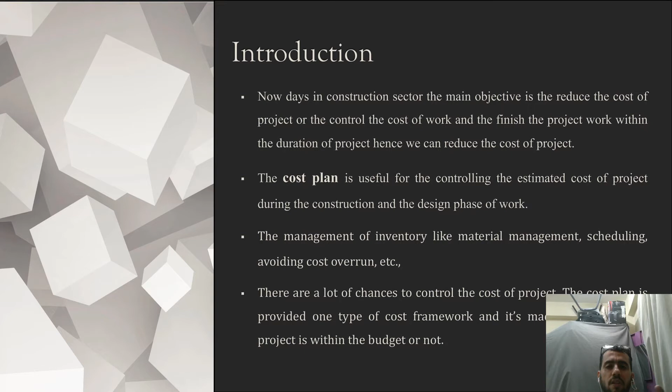What is cost control? Cost control is a process of reducing the project budget by using various techniques and replacing with alternative materials, which helps to reduce the cost of the project.

The cost is controlled by using past construction information and reducing wastage materials, extra equipment, and also by using alternative materials, replacing costly materials for the construction. The main aim of cost control is to gain maximum profit within the decided project duration.

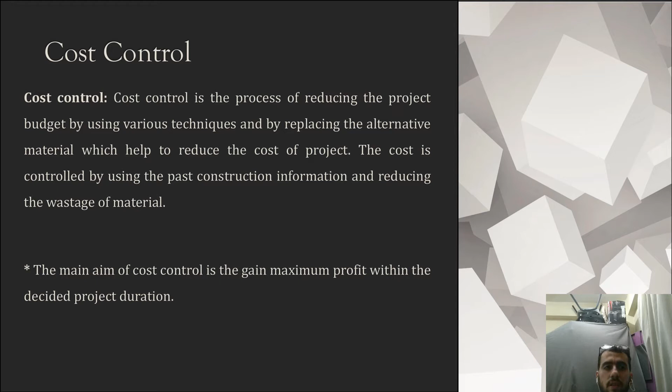Also here, cost planning. Cost planning is the process of management looking to control the design and development within the client's budget. This method helps the client choose how he or she wants to allocate the budget to different parts of the project work, and it's used to represent the cost plan for the project.

The project planning provides the cost structure of the work, and it's useful for deciding the cost of the project or the budget of the project, and the activity of element construction work, as well as the duration of the project work.

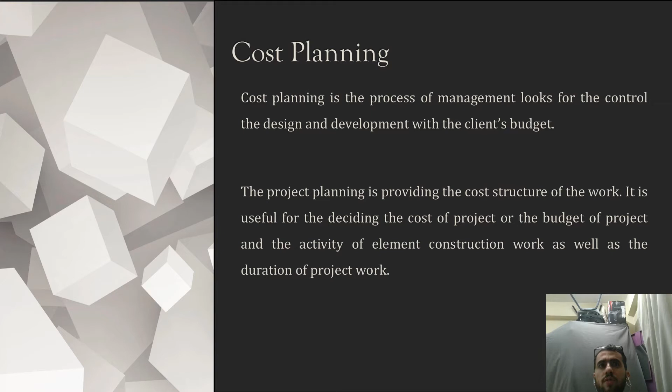In terms of problem statement, usually in the construction industry, the actual cost is more than the estimated cost. This type of problem needs proper management, planning, and control of the work to resolve it.

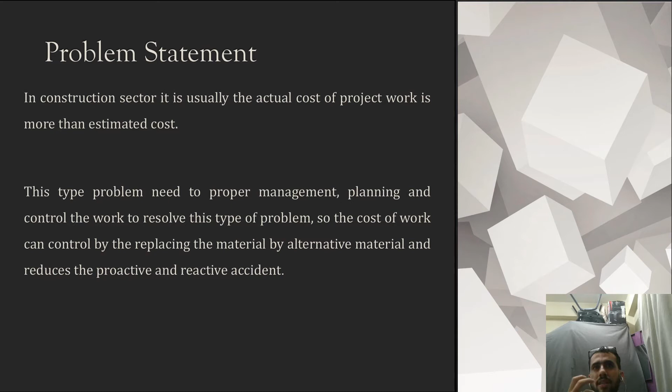So the cost of work can be controlled by replacing materials with alternative materials and reducing proactive and reactive accidents at the site. The main objective of this study is to control the cost of the project by replacing alternative materials and avoiding proactive and reactive accidents in the construction industry.

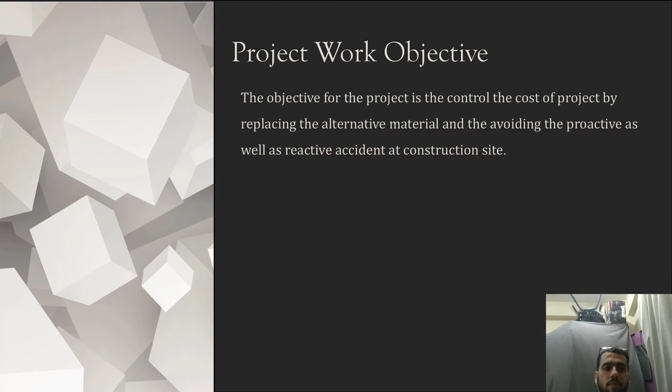In terms of project description, this study has been done based on a residential building called Pride Ashiyana. It's in a suburban area situated near Lohegaon, Pune. This building consists of 548 apartments covering around 10 acres.

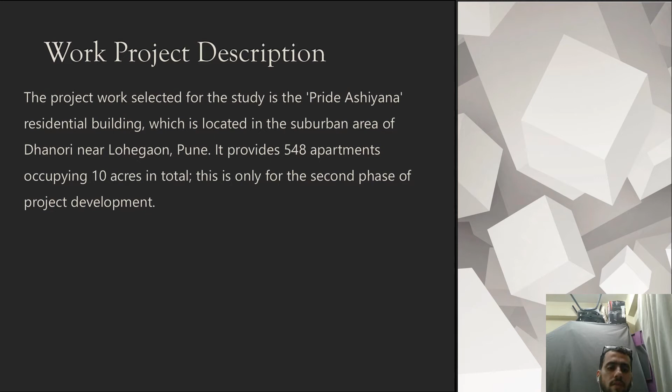Study background, this has been done based on literature review.

There are three different kinds of estimation calculation within the production process, along with a diagram representing the concept of determining the cost. Pre-calculation estimates the future cost before starting production and is used for cost-based decision making, and intermediate calculations are performed within the project for the purpose of controlling the cost.

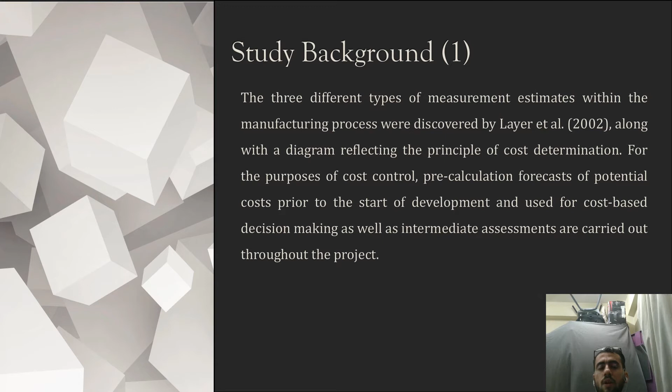From another view, most problems on building sites are the wastage of materials because of varying circumstances. This type of problem needs strict supervision on the losses.

According to Hendrickson in 1988, the wastage of materials takes place within the procurement process, storage, and use, and also damage because of unnecessary handling and transportation.

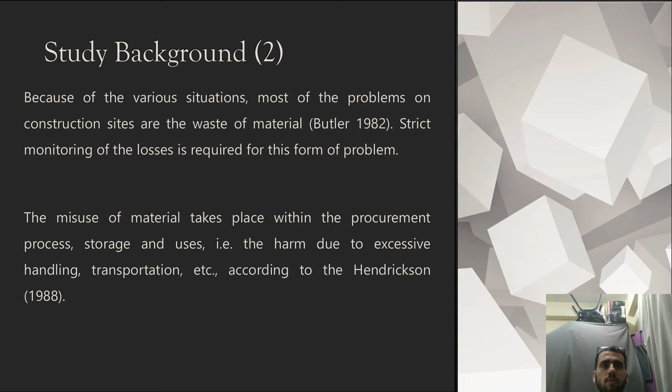Another perspective from Alinaitwe in 2006: he observed that industrializing construction would probably reduce the cost of construction by about 30%, which would likely settle the backlog of 25% of Ugandans without proper housing.

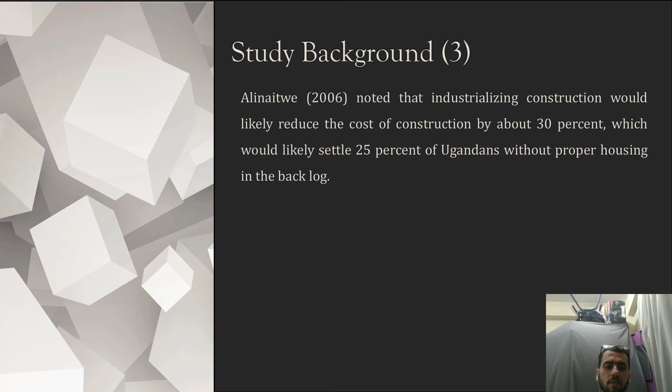For this project, the cost is controlled by replacing materials with alternatives, which can help control the cost of construction and maintain the quality of the construction as well.

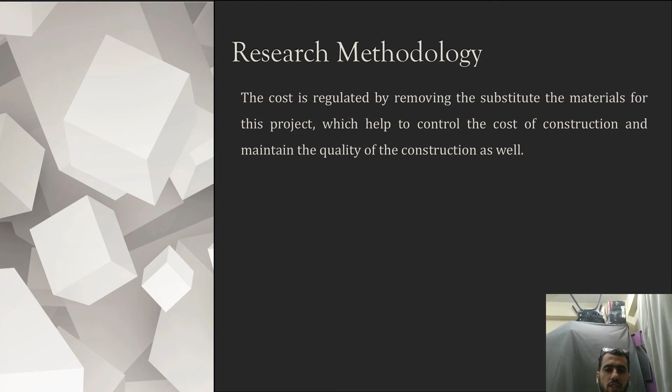In this stage, we have reached the gist of this topic, which is cost control techniques. Based on this study, they use two methods to control the cost. The first one is proactive accident avoidance during the time of construction, which has four items.

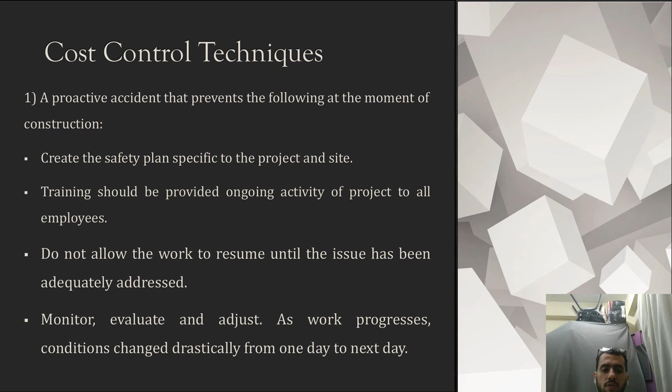The first is to create a safety plan specific for the project and site. Training should be provided as an ongoing activity of the project to all employees. Also, do not allow work to resume until the issue has been adequately addressed. The last one is monitor, evaluate, and adjust as work progresses, conditions change dramatically from one day to another.

The second method for cost control is reactive accident avoidance at construction sites. It has three items: the first is the worker not wearing proper protective gear for the job, the second is the worker not following rules and regulations, and the last is tools malfunctioning and misuse of equipment.

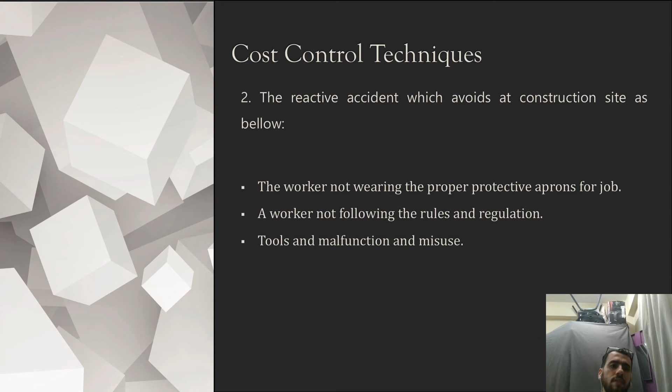For example, the first one is windows. The alternative materials were glass louvered aluminum frame and glass casement. So the alternative chosen was powder coated aluminum, and so on for the rest.

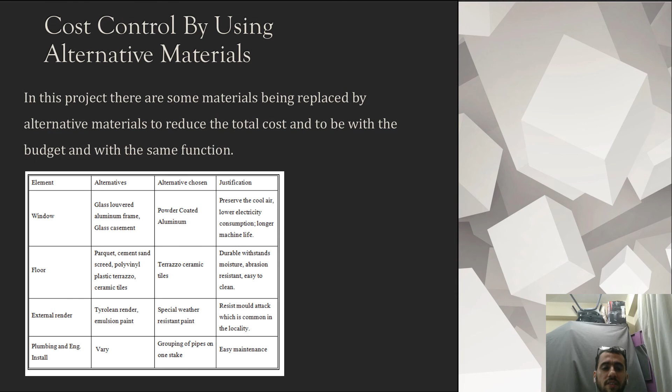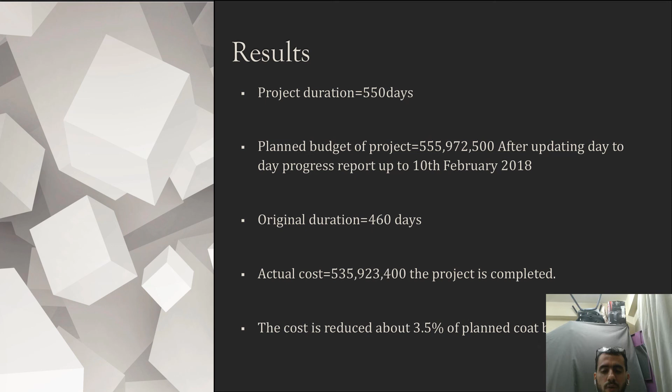Also, the most interesting point is that the estimated cost was 555,972 and 500, but the actual cost was less than that by 3.5%. The project was completed at 535,923 and 400. These techniques are the most successful techniques to reduce the cost of construction.

Finally, I would like to say the residential building project was accomplished as per planning, estimating, and controlling. So the total cost of the project can be calculated during feasibility, and even in the case of knowing the construction area, that time it is easy to calculate.

Also, I would like to add that the cost control system has a lot of chances to reduce the project budget or to maintain the cost estimation. In general, all of these techniques rely on the site manager and contractor experience.